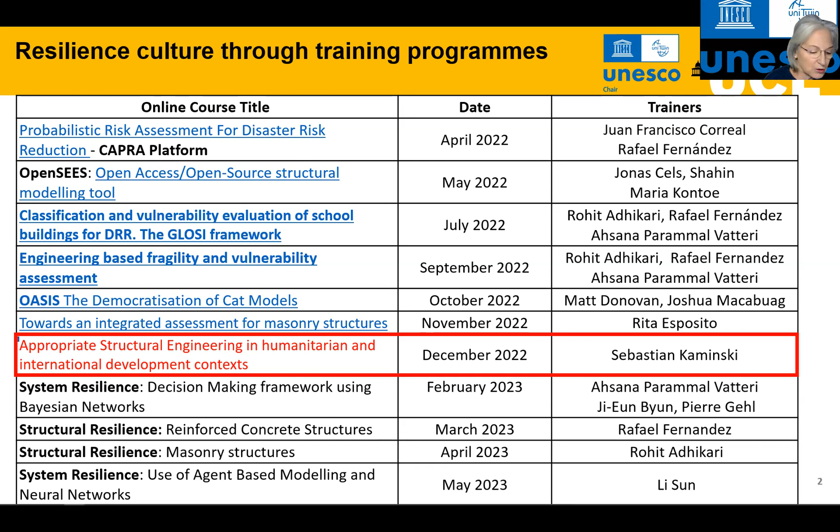So today I would like to introduce the talk by Dr. Sebastian Kaminski. He's an engineer associate at Arup, and he has been here in London, and he has been working for a long time in the field of humanitarian and development constructions and reconstructions in various contexts, affected by natural hazards or at risk of being affected by natural hazards.

Sebastian will introduce his talk in more detail in 2 minutes, but as we are at the end of the year, I would like to expand a little bit on our other activities besides the educational offer, which, as you have seen from the previous slides, will continue from February.

We already have 4 more courses programmed, and these will all be 1 or 2 day extended activities or full training. But in the meantime, the UNESCO Chair in Disaster Risk Reduction and Resilience is also developing some actual research projects.

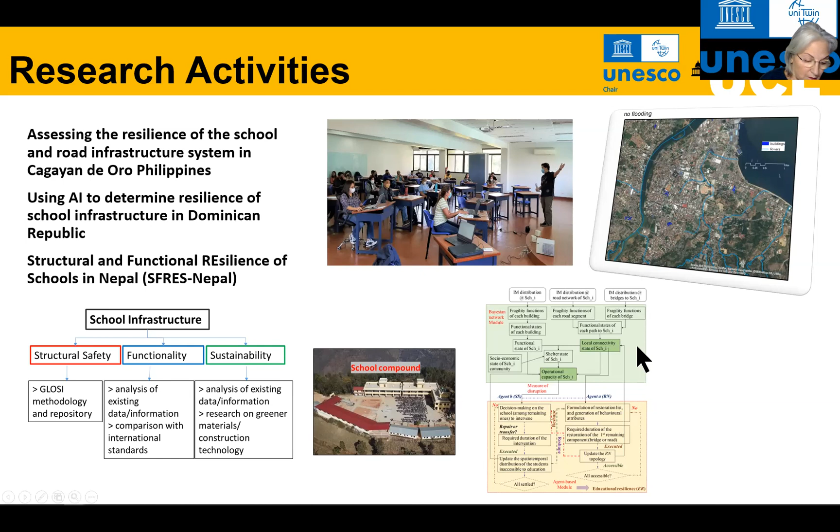So besides doing research and meeting you online, we have also been to a number of international and national events which are worth bringing to your attention. At the beginning of November, UNESCO celebrated an international conference for the 30th anniversary of the UNESCO Chairs programs.

It was a very amazing meeting lasting 2 days with as many as 600 attendees, one or more for each of the chairs that are bestowed all over the world. As a result of these meetings, we have extended a network among European chairs, established a network among UK chairs, and a network among chairs on disaster risk reduction.

It might be worth understanding that the UNESCO chairs are in any field of culture and science. So in fact, the chairs in engineering and in disaster risk reduction are not so many, just about 10.

Besides that, I've been working quite a bit with the Foreign Commonwealth and Development Office of the UK government. In particular, we have contributed to a position paper on education and climate change, which should be available soon, and you will find a link on our webpage. This is particularly aimed at understanding the double whammy of negative actions on women's and girls' education, coming from the effect of climate change and the effect of poor school infrastructure, and therefore how we can improve that.

Thank you very much, Dina. Shall I start? Yes, please. Right, so I'm just going to share my screen. Can everyone see that? Yes, we can. Thank you. Excellent, just setting up.

Great, okay. Well, thank you first, everyone, for attending this talk today. I hope you find it interesting. And thank you very much, UCL, for inviting me to talk on this interesting topic.

So I'm going to be focusing on appropriate structural engineering in humanitarian and development contexts.

Is it possible to mute the sound when people come in, or? Unfortunately not. Okay, no, that's okay, no worries.

So basically, globally, we desperately need more resilient homes and schools in developing countries. At the same time, we do need to maximize the use of low carbon materials, such as timber, bamboo, and soil. We have to be honest that it is more difficult to design with these. So in this talk, what I'd like to do is talk about, firstly, how we can design appropriate structure and appropriate schools and housing in these contexts while trying to maximize the use of low carbon materials. And that's not an easy balance.

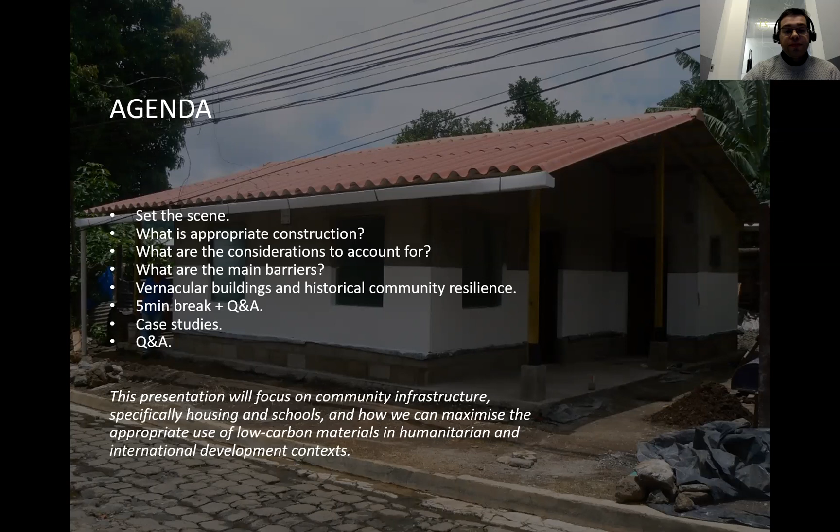So let's start by setting the scene. What do we need to achieve and why? Firstly, in terms of climate change, I'm sure we all know that cement contributes towards around 8% of global CO2 emissions. Now that's enormous, and that's something we need to do something about, urgently.

At the same time, we need to consider the magnitude of inadequate construction combined with natural disasters. Around 1.6 billion people live in inadequate housing worldwide. That's a significant proportion. When we say inadequate housing, that's any sort of housing which is unsafe structurally or exposed to other hazards such as flooding, or it's too cramped or unhygienic. At the same time, earthquakes are actually the primary source of deaths in natural hazards, around 60,000 people per year globally on average. Some years there'll be more, some years there'll be less.

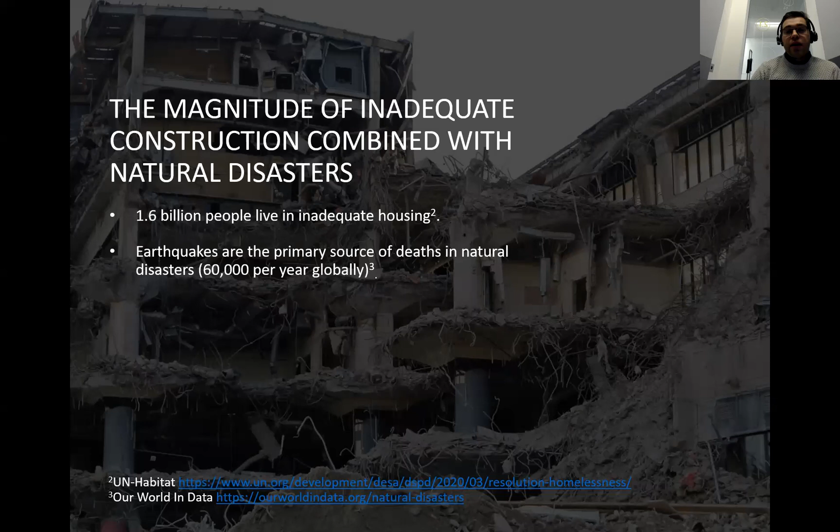So why are so many buildings in developing countries so vulnerable structurally to earthquakes? I think we can summarize this down to two real reasons: firstly, inadequate structural design, and secondly, durability issues. When I say durability, that's the design's reached the end of its design life, or it wasn't designed properly to begin with.

Geotechnical issues also play an important part, but these can be difficult and expensive to resolve structurally. The reasons behind the inadequate structural design and durability issues are primarily a lack of funds and a lack of knowledge. With both funds and knowledge, we're able to create very resilient buildings.

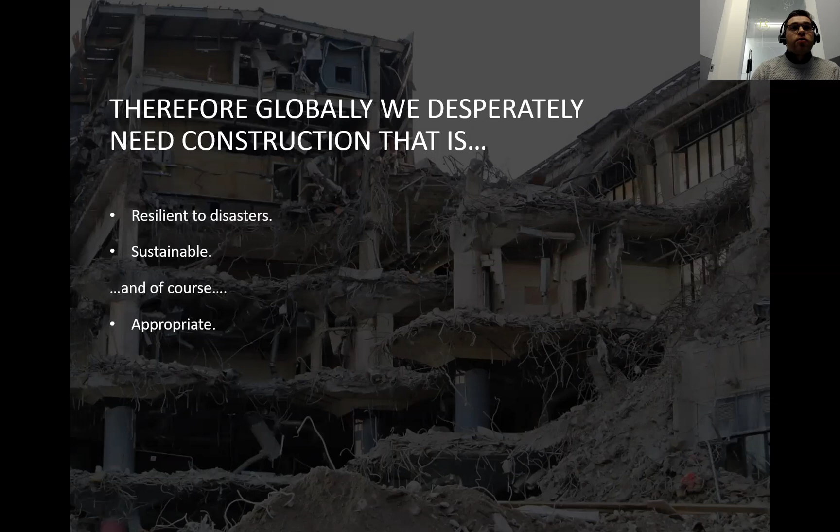So globally, therefore, we desperately need construction that is resilient to disasters and sustainable, low carbon, and of course, appropriate. So what is appropriate? It's one of those buzzwords that we hear a lot, but what does it actually mean?

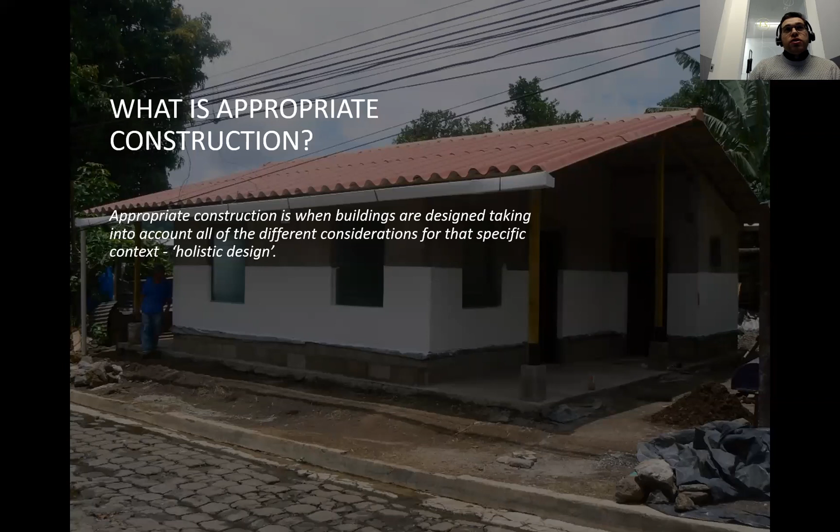I'm not sure there's one definition for this context. This is just my definition. Appropriate construction for me is when buildings are designed taking into account all of the different considerations for that specific context. We can call it holistic design.

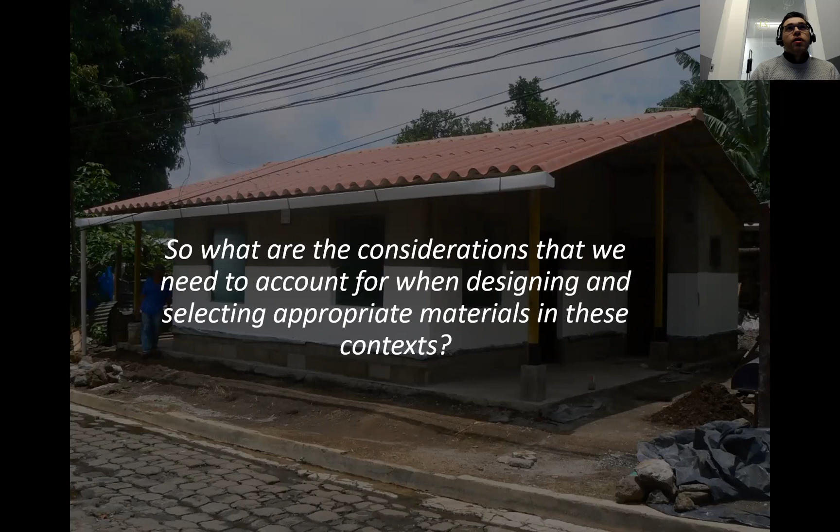So what are these considerations that we need to account for when designing and selecting appropriate materials in these contexts? Let's go through them, there's quite a lot. Budget. Unfortunately, that is one of the biggest constraints. It defines what we can and can't do right from the beginning.

Material availability. We see in these contexts, whatever materials we have available are what we can use or can't. Local is always preferred. However, sometimes it may be more appropriate to go further abroad if for the design it's more holistically appropriate, and the material needs to be of the right quality.

So a couple of examples there. We've worked on a project in Central America, and we wanted to use timber for the structure. Now, the local timber there was actually quite expensive, it wasn't properly structurally graded, and it was treated with quite an old toxic chemical - CCA, copper, chrome, arsenic, which is now banned for non-commercial use in, say, Europe.

And it doesn't come from a reliable sustainable source, so it wasn't FSC or equivalent certified. On the other hand, we were able to source timber from the States, which was available locally but shipped from the US, which ticked all those boxes - it was certified, it was cheap, it was graded. So in that particular case, it was more appropriate for us to select a material which came from further afield. That's just one example, there might be others, but obviously we want to go local where we can.

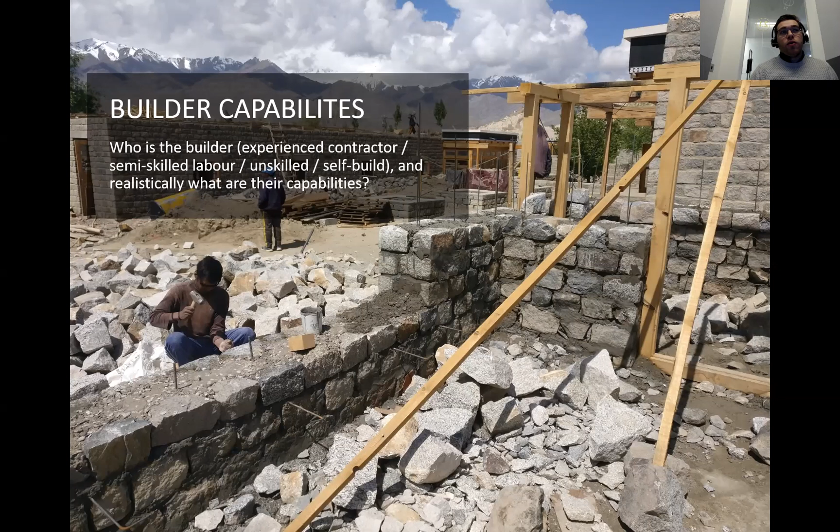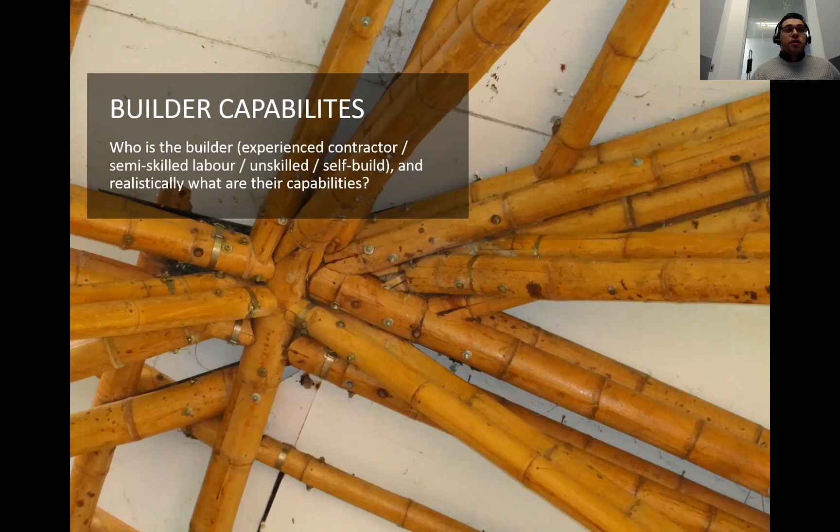We don't want to end up with something like this. This is a bamboo project where you can see there's a lot of splitting of the bamboo. The connection just wasn't clearly designed or built right.

Designer capabilities. This is important to understand. What are the capabilities of the design team? Sometimes we might be the design team, sometimes we might be on the client side, sometimes we might be developing a scheme design, which then a local design team takes forward.

It's important to understand what are their capabilities. Do they understand the particular material we're working with? For a recent example, we're working in a country with an NGO where they're building a community center, and we proposed reinforced block work because we felt holistically for that context it was the most appropriate. The local design team didn't have experience with reinforced block work, and that was a big issue, of course.

So in that case, we actually tried to upskill them, provide some example calculations that they could then use and hopefully be able to construct that well and use it on other projects. But in some cases, we were very close to saying, well, unfortunately, what we think is the most appropriate technology, you can't use, so you need to pick a different one. But in that case, we were able to overcome that.

Codes and guidance available. Are the local codes state-of-the-art, comprehensive, and easy to follow? There are very few codes in the world that are all three of those. The state-of-the-art codes tend to be very difficult to follow, and we have to be honest about that.

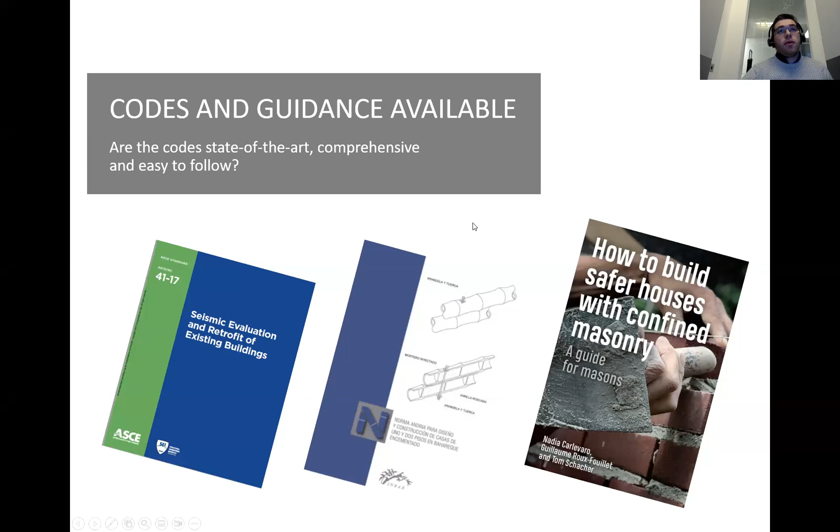Hazards. We always need to understand what hazards the buildings will be exposed to. It's really important to draw on local knowledge, but be aware of some misconceptions and also draw on broader scientific data. Certain hazards may be better captured in local knowledge and certain hazards better by broader scientific data, especially where you have hazards of different return periods.

A hazard with quite a long return period may be beyond the memory of the local community, such as earthquakes. So the locals may believe that actually the area isn't very highly seismic. Broader scientific data says differently.

On the other side, local knowledge can often capture things like flooding better than broader scientific data. So it's important to review both of those, try and capture that, and be aware of some misconceptions on both sides. At the same time, include fire risks, which is a real hazard, especially in things like refugee camps. That can really define your material.

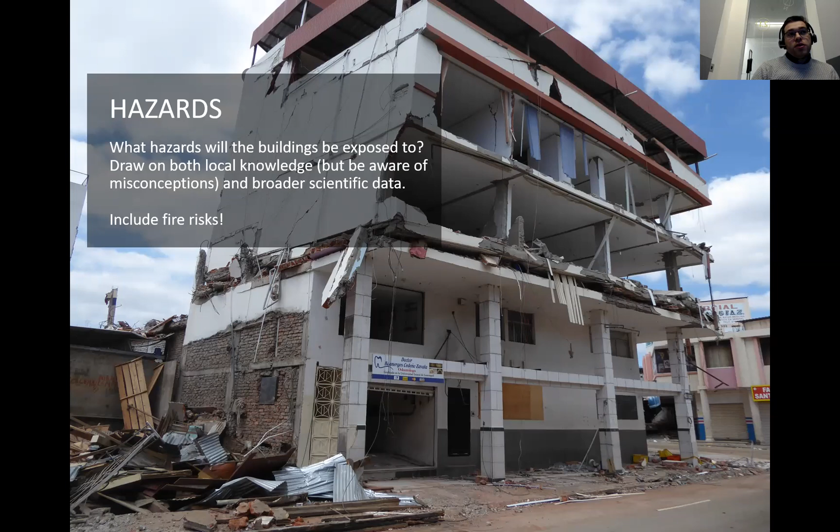So hazards where events are infrequent may be beyond the memory of the community. One example is Haiti. Prior to the 2010 earthquake, the last large earthquake was around 170 years before, way outside of the memory of the community. And that's one of the reasons, not the only one, but one of the reasons why the buildings were very vulnerable.

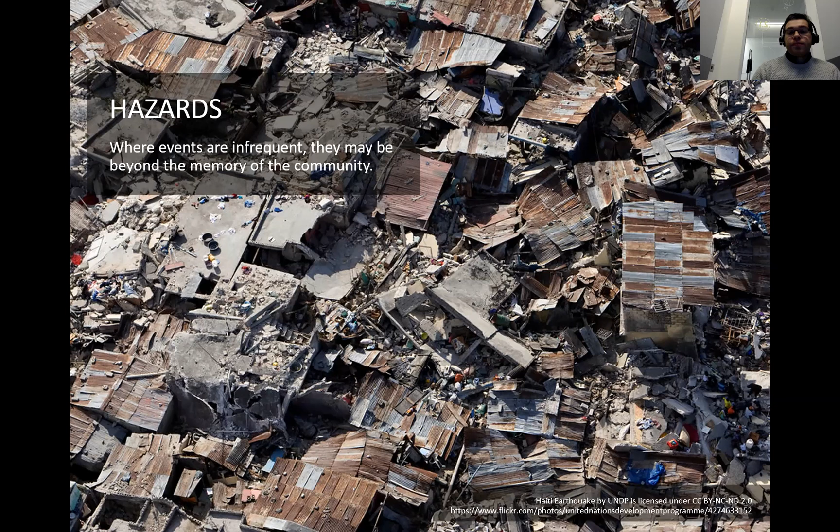Structural performance requirements sought. In humanitarian contexts, and when I say humanitarian I'm thinking more emergencies, we can normally just achieve the best we can within those constraints. It's an emergency context. We're trying to provide shelter, schools, or warmth as quickly as we can to probably quite a large affected population. We can't achieve code compliance. Fair enough. We just want to achieve the best we can.

But in longer term development projects, why shouldn't communities in developing countries have the same resilience and durability that we're working towards in developed countries? I mention this because it doesn't always happen, unfortunately.

In California, for example, they routinely design, well, especially more and more now, routinely design beyond code because they know that actually it's generally better and cheaper, taking into account the entire whole life of a building, to have a more resilient structure from the beginning.

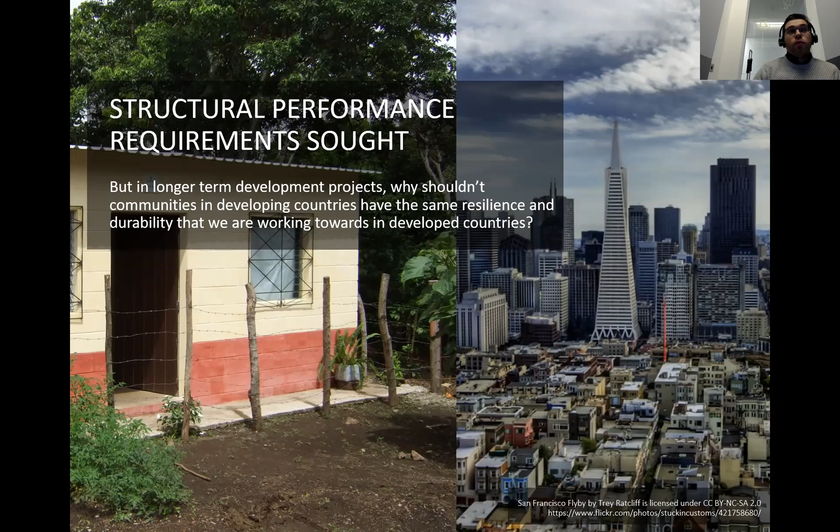Financially, it's actually a better decision to invest more money at the beginning rather than deal with the impact of a disaster. And it's the same in vulnerable communities in developing countries. Why shouldn't they have the same resilience and durability? It doesn't always happen, but in my opinion, I think it's very important that we should really strive to always have that, especially for

schools. Exposure conditions for durability. This is very important to understand, and actually it's one of the areas where we see a lot of issues. So what conditions are the proposed materials being exposed to?

Insects, rot, corrosion, weathering. And we should really be looking for a 50-year design life. Most codes, without stating it, actually design for a 50-year design life. Reinforced concrete codes and steel codes and so forth. Even timber codes, without stating it, generally assume a 50-year design life.

But this often isn't achieved in practice because the design doesn't cater for that, and it's mainly about exposure conditions. And we see with natural materials such as timber and bamboo that designers often underestimate the risk of rot because it's not immediate. It's not something you see on day one or after a year, but after 5 or 10 years, you can start to see that.

And often codes in this area aren't adequate. For example, only 2 out of 11 of the main bamboo design codes that exist around the world properly tackle durability against rot. And that's a significant gap in the information.

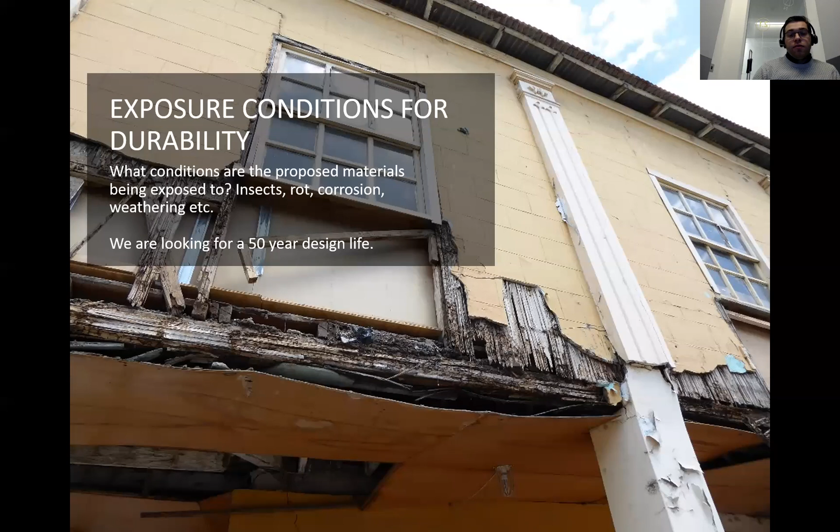End user maintenance capabilities. We often hear people propose that it doesn't really matter about the design life, because communities will just replace key structural elements of their buildings, schools, or homes. Is that really appropriate, to have a vulnerable community periodically replace key structural elements? Non-structural elements is fine, but key structural elements, we don't do that on our houses in the UK, do we? We expect key structural elements to last at least 50 years.

General maintenance is conducted especially on non-structural elements, since it's very difficult to replace key structural elements. The end user may often forget this is important, or not be aware of it. They may have moved out and someone else occupies the building, so often they're not informed correctly that this maintenance is required. They may not have the resources or technical expertise to do this. Generally, I feel it's not appropriate to require a vulnerable community to have to do this.

We can design buildings out of all materials, including natural materials like timber, bamboo, and soil, to have a 50-year design life with minimum maintenance. It's quite easy to do, and it has been done, so we should just go ahead and do that.

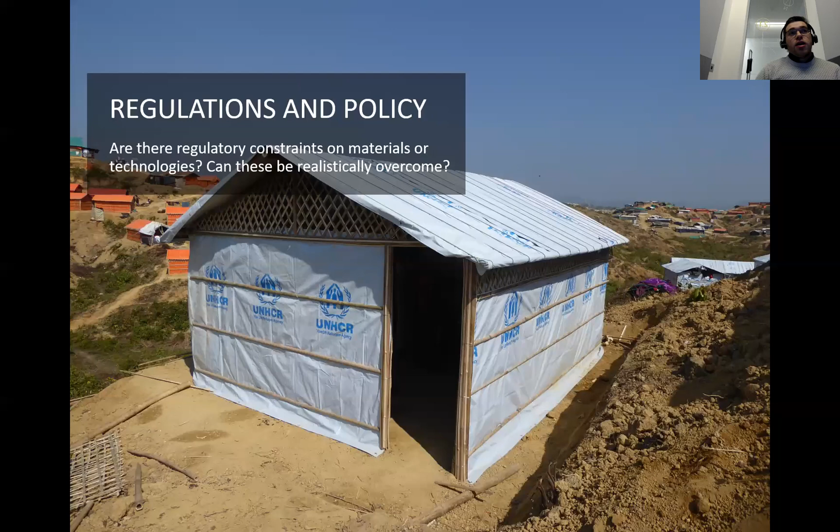Construction safety. Are there any construction-related risks associated with the proposed materials or technologies? We shouldn't just design something, assume it'll be built, and not care about the safety of the workers during construction. We might be picking a certain technology which requires working at height.

We might be using certain treatment chemicals on the bamboo or timber which are actually quite toxic. Then we need to think, will the treatment workers realistically be using the right PPE? How will the chemical be disposed of? Those are real things to think about. In many cases, we've actually specifically not selected some materials because we feel the construction workers will be exposed to risks which are disproportionate.

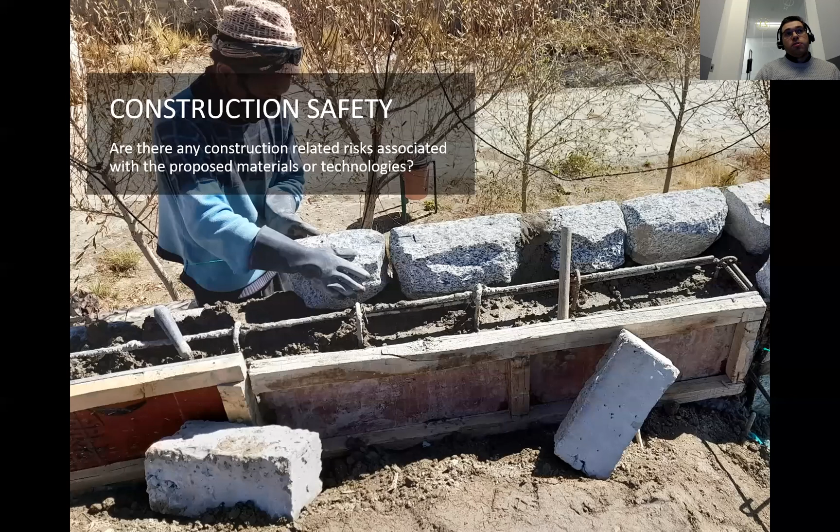Requirements for extensions, adaptations, replicability. This is a tricky one. Does the design need to cater for extensions or adaptations by the end user? It's actually very difficult to have a design, a school or a house, which can be simply and safely extended. Reinforced concrete can be done, but often that doesn't go quite right, and it's much more tricky with natural materials such as soil, timber, or bamboo.

At the same time, is the intention that the design gets replicated by the community themselves? Full self-build construction is very difficult to influence and very difficult to create a new technology around. It takes decades for a new technology to filter down to a community so they can actually self-build it. Often we see designs where people say this is going to be a self-build design, but it doesn't go anywhere because it's so difficult to trickle down.

It's important to understand the local annual climate, as this can affect the structural and non-structural materials. If we have a hot climate, thermal mass is good, and heavy, large, thick walls can work well. There are other ways to reduce the temperature in a building too, for example a light roof, large overhang, large windows, and ventilation.

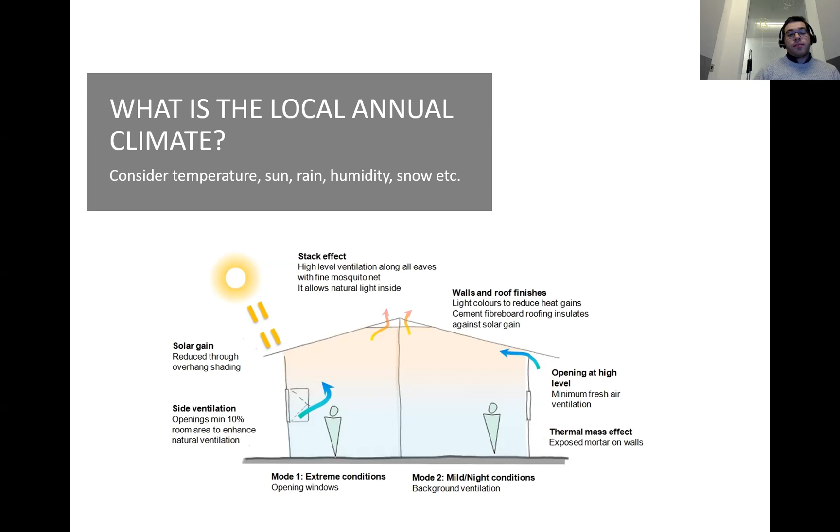Local cultural considerations are really important - keeping up with the Joneses, as you might call it. People worldwide tend to aspire to have what they perceive to be a better, stronger, more durable form of house construction, one that reflects a higher level of prosperity compared with their neighbors.

Bamboo is regarded as a poor man's timber, and timber is regarded as a poor man's concrete. People generally want to live in a reinforced concrete or reinforced blockwork house. That's very common. People generally don't want to live in a bamboo house or a timber house.

It is possible to change those perceptions, and we've done it before. We did it on a project in Latin America where we developed a bamboo house. Initially the community said, 'I don't want to live in a bamboo house - bamboo doesn't last very long, it's not very good, I want to live in a concrete house.' We showed them the design and did some workshops. By the end of that process, they'd all done a 180, and they all preferred the bamboo house to the concrete house. So it's possible to change people's perceptions, but it's difficult.

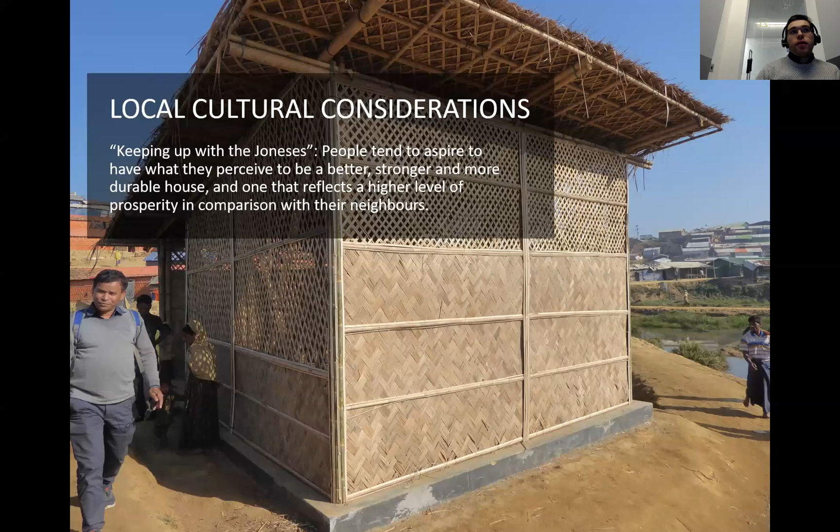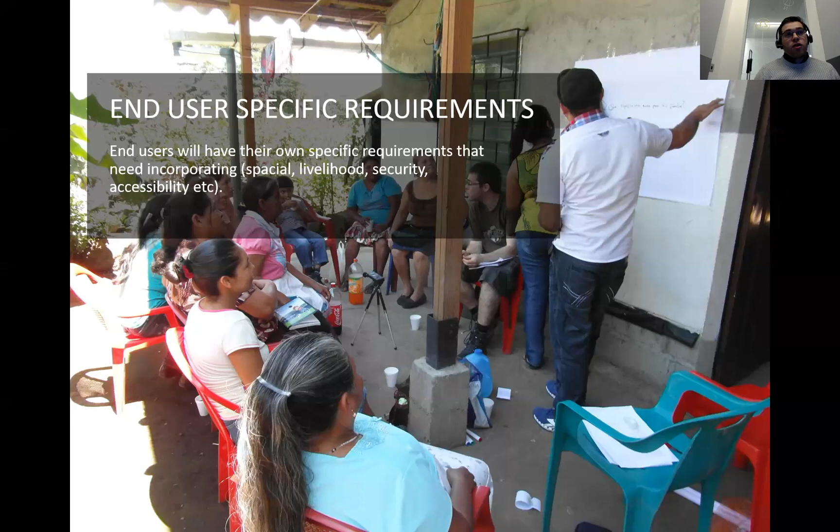That's just one of many local cultural considerations there might be. There may also be additional end-user specific requirements that we need to incorporate. They may be spatial - how they want their layout - or related to livelihood, like wanting a shop space with an open front. They may want security features like multiple exits, bars on windows, or accessibility. All of these can affect the structural and non-structural materials of a design.

Embodied carbon of materials and construction techniques is essential, something we should be doing routinely for every project now. We should be considering the whole-life embodied carbon, including the design life of the entire structure.

Natural materials such as timber and bamboo are not automatically lower carbon compared with concrete and steel. They can be, and often are, but not automatically - it depends on their design life and how they're built. For example, for fire protection of timber and bamboo, we may have to use plasterboard, which can have quite a high embodied carbon.

When you take that into account, in some cases you may find that concrete actually performs better than bamboo or timber - it's quite rare, but it does happen. So we should be looking at the whole building embodied carbon, and at the same time take into account the design life. If a bamboo house only lasts 10 years, but a concrete house lasts 50 years, then maybe the bamboo house has a lower embodied carbon, but it only lasts 10 years - we're not comparing apples with apples. So we should be taking that design life into account.

It's also important to understand the wider social and environmental impact of materials - how they're being sourced, where from, and how waste is disposed of. One example is the Rohingya refugee camps - as far as the eye can see, you cannot see any vegetation or trees. They've all been cut down for construction and firewood. So sourcing materials from there can actually have a knock-on impact.

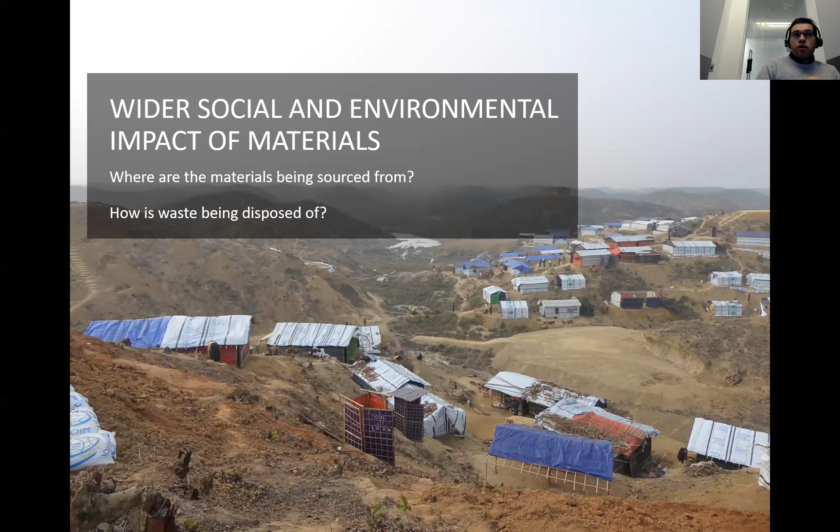At the same time, how is waste being disposed of? I'm thinking particularly of treatment chemicals for bamboo or timber. If we're keen to use a natural material but need to treat it with a toxic chemical that's likely to be disposed of close to a drinking source, that's just not appropriate. Sometimes we might say we'll just tell them not to do that, but if we think that's realistically going to happen despite the controls in place, maybe that's not the right material to select.

How complex is the proposed design, taking into account the number of stories? If we are using more modern or natural materials, we have to admit that the codes are still not as advanced as, say, reinforced concrete and steel. So it may be more challenging to have a complex design or a large number of stories.

One example is the new ISO 22156 bamboo code, published in 2021, which is arguably one of the most advanced bamboo codes around. We limited the number of stories to 2 intentionally because there's actually quite little data to support beyond that at the moment. In the future we can expand that, but for now we are a little bit nervous.

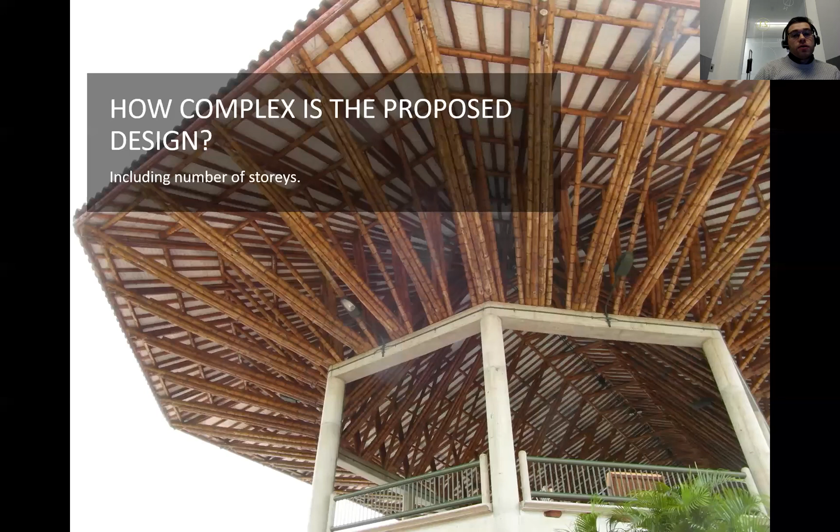So that's quite a lot to think about. These are in no particular order, and there may be more - these are just key ones that have come to mind. But you can see there's a lot we need to consider when properly choosing what materials are appropriate for these contexts, and therefore what technologies.

So now we know that, what are the main barriers towards wide-scale appropriate construction that maximizes low carbon materials?

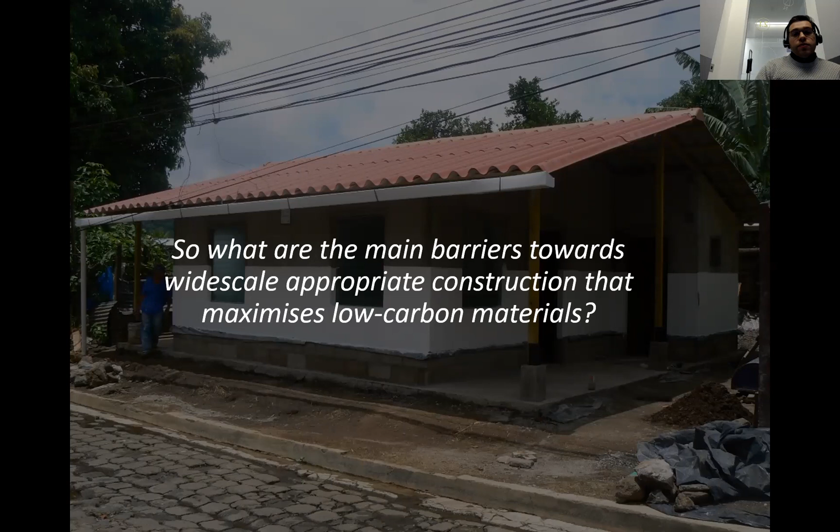Back to our friend budget, unfortunately this is always a constraint. It's a bit of a misconception that bamboo, timber and soil are automatically cheaper. It's not necessarily true. If we're designing properly, sometimes they can be more expensive because more testing is required, since the codes don't have the data in place to support design without testing.

Certainly the same for bamboo and soil, and with certain types of timber that's also true. Whereas reinforced concrete generally doesn't require testing - one can just go ahead and pick up a code and use it. So unfortunately it is a real constraint. Over time, as there's more knowledge, that will improve, but it's a real constraint at the moment.

Knowledge - this is very important. Reinforced concrete has so much knowledge out there. Most codes have their own concrete code or point to another concrete code that's very well established. Whereas other materials, timber for example, the codes around the world are sometimes very basic. The bamboo codes - many countries don't have them, and some that do exist are quite basic. Even the most advanced codes, the Colombian and the ISO code, are comparatively basic compared with the reinforced concrete code.

It's similar with soil - there are very few codes around. Also with masonry, especially simple masonry structures like reinforced masonry and confined masonry, there are comparatively few codes and guidance around.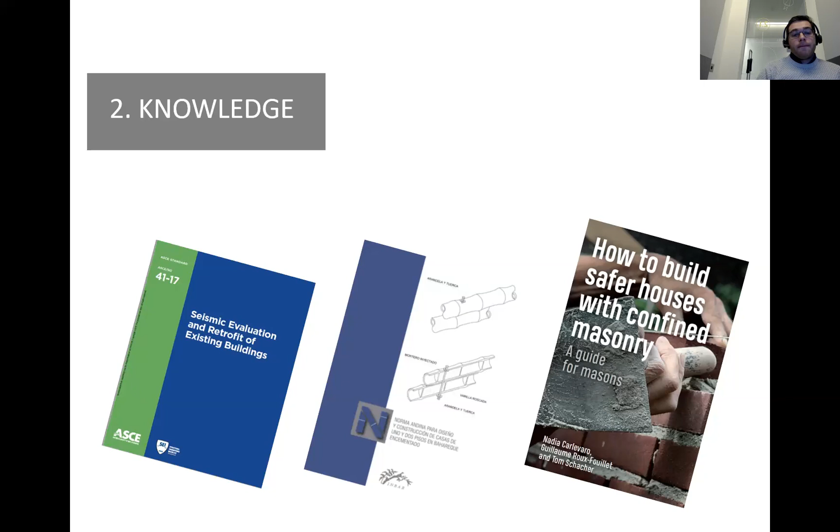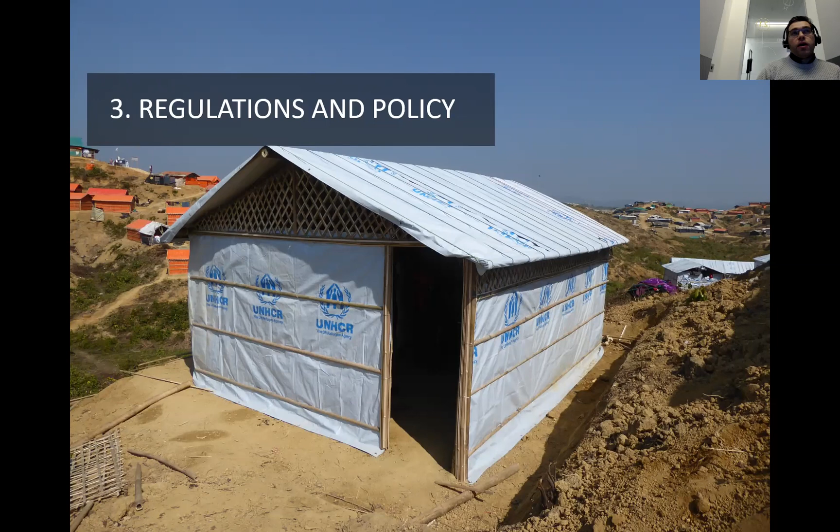Regulations and policy - again, if the regulations aren't in place to use natural materials such as timber and bamboo, sometimes we can't use them. As I mentioned before, sometimes we can engage with authorities, and if we've got enough time, we can even start to write the codes - that's one way of overcoming those barriers.

Similar to before, community aspirations. We need to be aware that people do prefer certain materials, but it can be possible to overcome that. We shouldn't force them, but we can work with the community to describe why this material, bamboo or timber in this particular case, is now durable - how have we made it appropriate, and how have we overcome their concerns with that material?

A desire to reinvent the wheel - this is an important one. We often see in developing world contexts and humanitarian contexts a desire to bring in alien technologies. On the screen now, these four aren't taken from developing world contexts, they're just general ones, but we see people trying to bring in plastic bottle housing, super adobe housing, tires, containers - all sorts of alien, unusual materials.

And people say, oh, this could be a material that this context needs - this is their solution for housing. With these alien materials, there's often a lot of problems with them.

They often don't satisfy many of the requirements I've just talked about. So many of these are very seismically unsafe. They're not very durable, they're not an appropriate way of actually recycling waste, and they can be unsafe in many different ways. Communities can't adapt them, which is very important, and they can't maintain them. Communities who haven't traditionally lived in round houses generally don't want to live in round houses - they want to live in square houses. Again, these are things which are really important to consider.

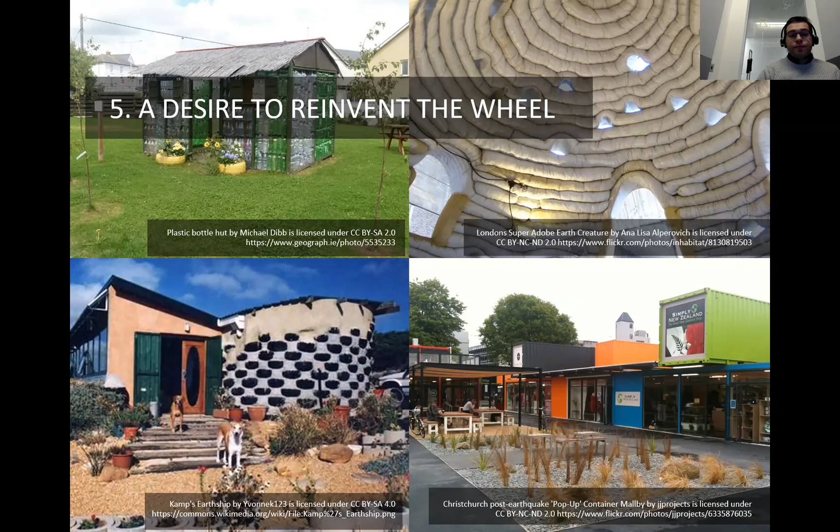Misconceptions. So like in all sectors, there are misconceptions, and I think it's important to know that because of these, we're not always building back better in these contexts. Beware some of the online guidance available, especially regarding seismic resistance and durability of materials such as timber, bamboo, and earth, because some of it isn't quite correct. It's very easy to read Wikipedia or Google and find lots of guidance, and it's difficult to know what is correct. I'd always recommend speaking to the experts and trying to get a wider range of different views.

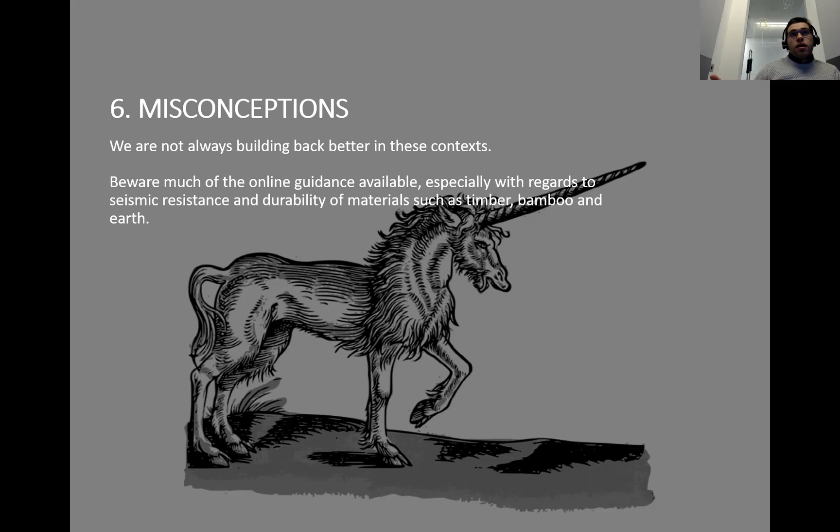There's a lot of misconceptions out there, and this isn't helped with these natural materials, where the research is comparatively new, and people may believe they're experts after only a limited amount of work in that field. If you are working with these, I'd always recommend speaking to a structural engineer for advice on timber, bamboo, and earth. And if we're talking about seismic design, they should be a seismic engineer.

Another example here is bamboo reinforced concrete. We actually see people trying to propose this, and we've seen people try and build with this. It's just one example of a technology which doesn't really work. People are trying to remove the steel from concrete and replace it with bamboo. Bamboo is much weaker, it's not compatible in terms of its properties, and it can rot in the concrete. Actually, if you do the analysis properly, you end up with something that has worse embodied carbon because you need a thicker amount of concrete. Yet there still continues to be research in this field. So just beware that there are some of these misconceptions.

Three papers that I've put up here deal with some of these misconceptions. The first one's on bamboo reinforced concrete. The second one is durability of bamboo, and the third, upcoming and not yet published, is the seismic performance of bamboo.

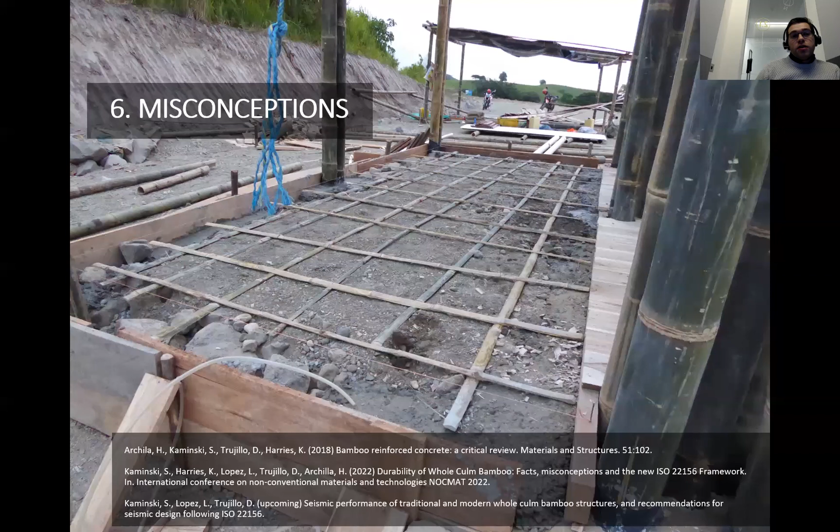Industrial pressure and corruption. Unfortunately, this can be a constraint which can stop us building with natural materials. One example here is a project where quite a lot of bamboo houses were built. In the past, this was a very successful project. The houses were very good quality, very cost effective, and very seismically resilient, especially compared with the existing housing technology within that country, which was more traditional, less safe, and more expensive. The bamboo project unfortunately had to stop because of death threats from the other industry. So it does happen, unfortunately.

Most new construction in developing countries is self-built. We need to be honest with that. This is real, and it's very difficult to positively influence. Modern code compliant houses are normally beyond the technical knowledge and purchasing power of fully self-built construction. So when we're developing designs, we need to be realistic about which market we're actually targeting, and there isn't one size fits all solution. Are we trying to influence the larger self-build market, which is difficult, but we need to try and support it?

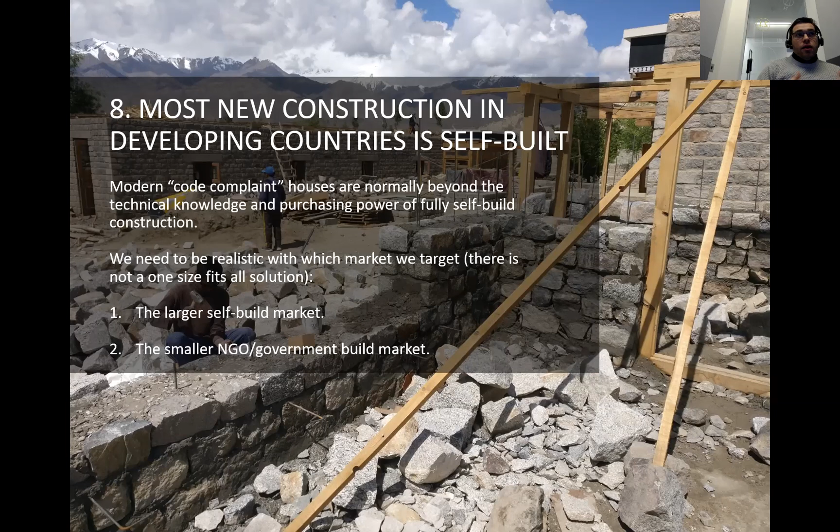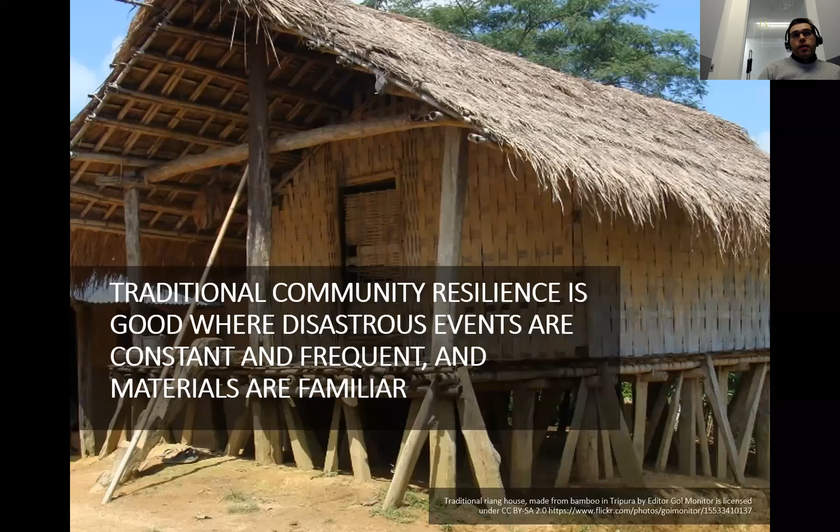But where events are infrequent or change, we can start to see a change in resilience. Haiti, again, also where other effects disrupt the community. This is the Rohingya refugee camps. They were previously further inland, a little bit more protected from cyclones, and had more vegetation around them. They're now in a more vulnerable position, having moved far closer to the coast with very little vegetation to protect them.

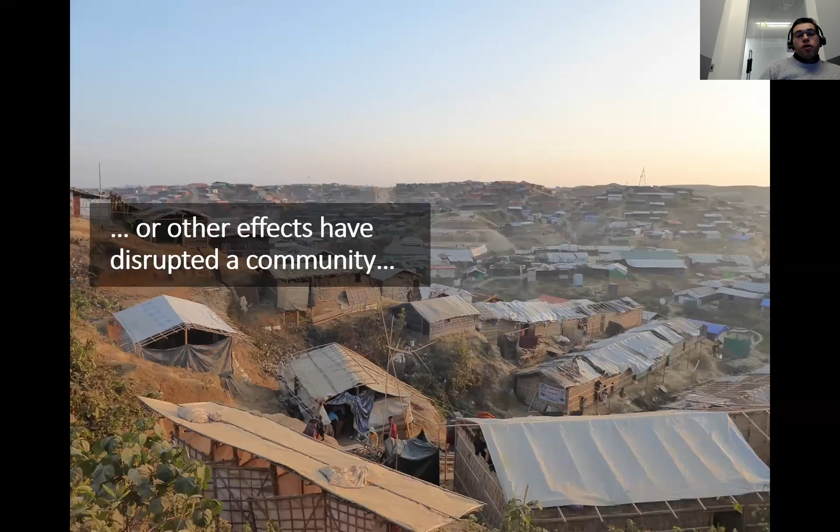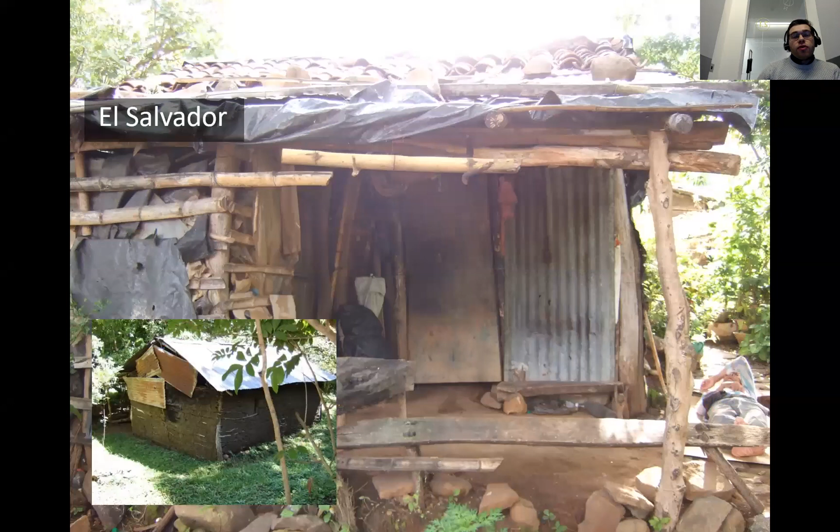Starting off in El Salvador, developing a seismically resilient and sustainable housing system. El Salvador is in Central America, a small country, a very highly seismic area, very mountainous, generally quite poor as well, with aggressive climate conditions, very hot and very heavy rainfall, so quite bad for natural materials. A lot of the population still live in very vulnerable housing due to the poverty there, and ever since the civil war there is a large housing deficit within that country.

For the past 12 years, we've been working closely with a small local NGO called Redes to develop a more sustainable form of construction for housing in rural and peri-urban areas that is seismically resistant, simple to construct using semi-skilled labor, able to be constructed in poor soil conditions, durable and low maintenance, cost-effective, sustainable, uses local materials, culturally acceptable, thermally comfortable, and appropriate for the community.

As you can imagine, a lot of those constraints are quite obvious. It's worth stressing that in this brief we've specifically said this is for housing in rural and peri-urban areas, simple to construct using semi-skilled labor. We're not trying to say this is housing that can do everything, I think that's quite unrealistic. By trying to do that, you end up not completing the project, or it ends up being too expensive or too complex.

So it's important to refine exactly who we are targeting. In this case, it was housing for rural and peri-urban areas. Urban area housing is a different matter, it's more complex, so we've intentionally said we're not designing for that. Maybe it can be used, but we're not intentionally designing for that. At the same time, we acknowledge that by trying to develop something more sustainable, it's unlikely to be the self-build market, so we've acknowledged it's going to be constructed using semi-skilled labor. That immediately unlocks the ability to use certain techniques which a fully self-build system may not.

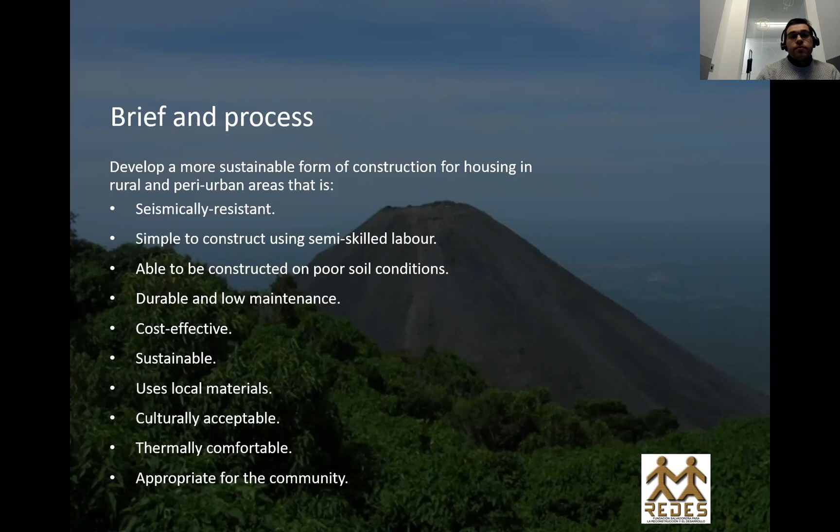So we started by reviewing the existing construction systems in the country, and this is essential to do on any of these projects - we need to understand what's typically built locally. There we've got housing out of reinforced masonry, confined masonry, precast concrete, and adobe. The reinforced masonry housing there is constructed by the majority of NGOs and the government, and actually it's very good, to be honest. It's very easy to build, hard to go wrong, durable, has good seismic resistance, and generally quite affordable as well, so we have a good technology out there.

The downside is it's generally quite high carbon. As you can imagine, it uses concrete blocks, concrete infill, and a lot of steel reinforcement. During this process, this is when we discovered the Bahareque system, which, as I mentioned before, is a derivative of wattle and daub. Most countries have a derivative of wattle and daub because it's just a very clever construction system. It uses timber or bamboo, which all countries have one or the other or both, for the frame, which we clad in a matrix of timber or bamboo and finally plaster with mud.

You can build it pretty much in any country, but each country has their own version. The Bahareque system in Latin America uses a lot of bamboo. In El Salvador, it tends to use timber for the frame and bamboo for the wall matrix because there isn't a large diameter bamboo out there.

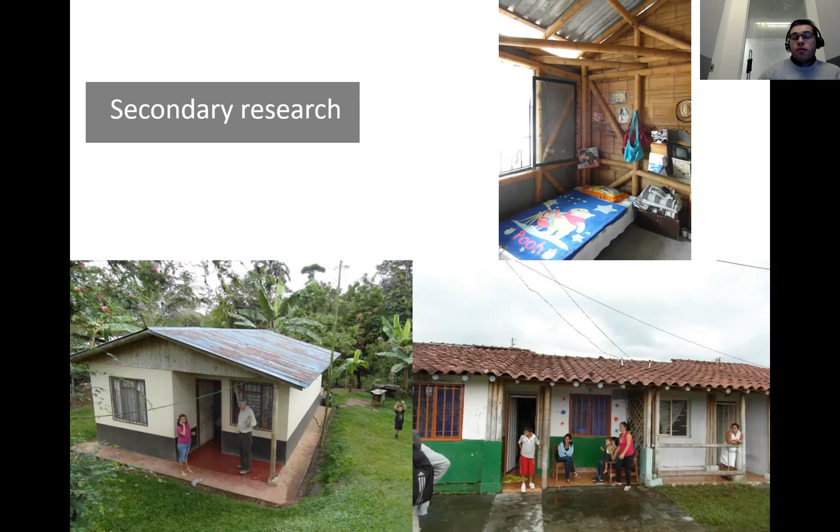Bottom left, this is Costa Rica. Over 1,000 houses were built with this system in the 1980s, still there in excellent condition - a very successful project. Bottom right and top right, this is Colombia after the 1999 coffee growing region earthquake, where they built several thousand of these houses as well - also very successful. In the Philippines, we've got Base Bahay working with the Hilti Foundation, constructing 1- and 2-story housing using a similar system very successfully. As you can see, it looks very modern. So several thousand of this system have been built around the world, which gave us a lot of confidence in its potential.

We then followed an owner-driven approach, involving the community at every stage in the process. This is very important - it gives us so much important data and allows us to develop something really appropriate for that community. We involved them through workshops, interviews, focus groups, and spatial planning workshops, trying to understand their perceptions of different materials and what they needed from a house.

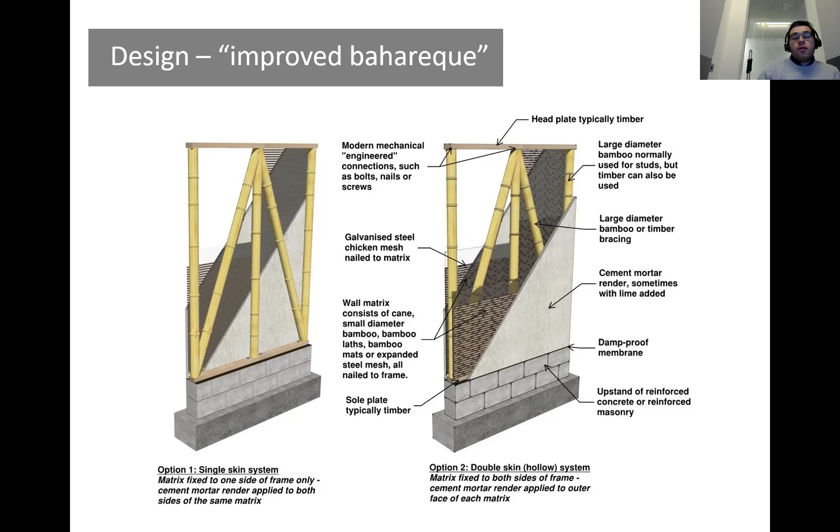Drawing all of that together, we came up with an improved Bahareque system for El Salvador. This used a timber frame clad in a bamboo matrix with a cement mortar render. The bamboo and timber were fully treated to protect against insect attack, and all the connections are engineered. The mortar provides additional durability, and this system can have a design life approaching 50 years when properly designed. It's fully code compliant from a seismic point of view, exceeding the requirements of the El Salvadorian code, and it's very popular with the community.

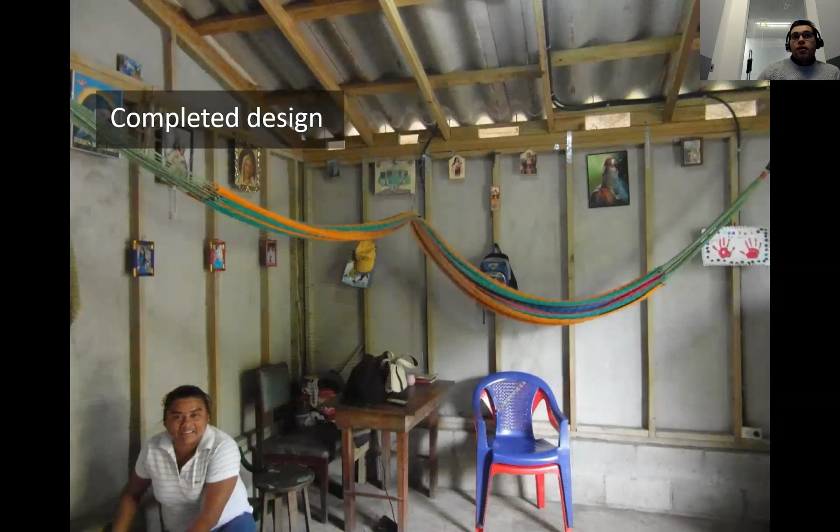This is the complete design before and after rendering. As you can see, it looks quite modern - it looks like a masonry house, and the community really liked it. This is the inside, where the timber is exposed. Again, the community really liked that design, and preferred it to masonry once they'd gone through the process.

We did a lot of testing to get there, and all the other organizations working on similar systems have done testing too. That wasn't easy - we couldn't just develop it from scratch. This is one of the tests we did: a full-scale shake table test of one room of the house, tested in Guatemala on the shake table at the Mariano Gálvez University there.

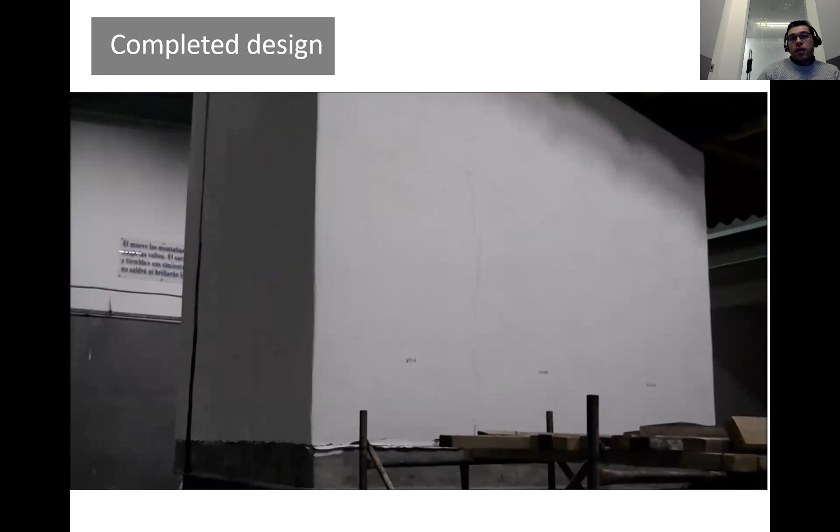This is tested to an earthquake that's over 2 times greater than what we need to design for in El Salvador - an enormous earthquake. This sample had already been through around 20 cycles of earthquake, and this was the largest one.

And the house was cracked, but it wasn't significantly damaged. It could be occupied immediately, and with simple repairs, it can be used. So it exceeded life safety from that requirement. It performed very well. So that was positive.

How we designed for sustainability: we tried to minimize the embodied carbon of the house as much as possible. We used timber for the frame. We looked at using local timber, but we weren't convinced that was holistically appropriate to use timber which wasn't FSC or equivalent certified and was treated with a more toxic chemical. So we used timber that's locally available but shipped from the US because it is FSC certified. Worth mentioning that the embodied carbon of shipping actually isn't that high. The biggest impact of embodied carbon is when materials are transported by land. This probably does have a higher embodied carbon than local timber, but we felt overall this was more appropriate.

The bamboo is bought locally, direct from farmers, and we've treated that with boron, which is a safe chemical to use, which is still very effective against insect attack.

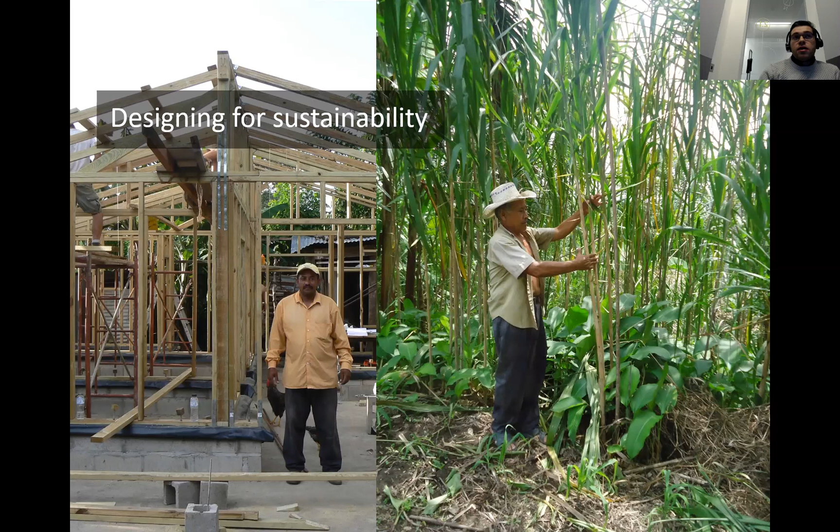Thermal comfort: the thermal mass of those walls actually provides some thermal benefits at night and during the day, during hot weather, and we've incorporated other simple techniques to keep the house cool: large openings, large doors, large windows, high level openings, and a large roof.

I forgot to mention also the embodied carbon of that house is around 50% of the embodied carbon of a reinforced blockwork house, and that's because we use a lot less cement. We use around half the cement content. Even though we do have cement mortar walls, it's a lot less than blockwork.

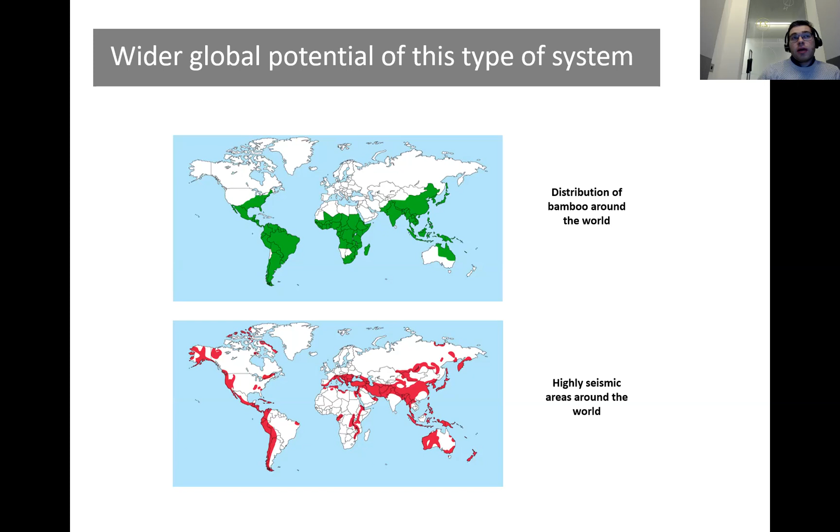There is wider potential for this type of system around the world. You can see in the top that distribution of bamboo around the world, and at the bottom are where we have highly seismic areas. A lot of those overlap. So we're working with other organizations, doing as much knowledge sharing as we can, trying to standardize the system and start to break down some of those barriers so other NGOs could potentially adopt it. We've incorporated this into the ISO 22156 code, the latest bamboo structural design code, published in 2021. We've also written several bilingual guides on using this system.

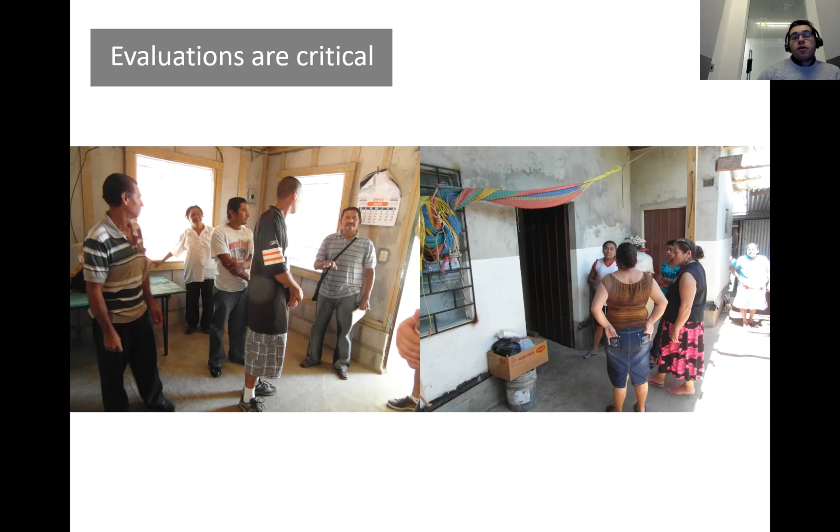Just to emphasize that evaluations are critical at many stages of the process, not just immediately after the building's been done, but ideally after 5, 10, 15 years, so you know how it's performed from a durability perspective. We did a lot of rigorous evaluations, and they were invaluable to find what the community thought about the design, and we've incorporated that into it.

I want to stress what we tried to do on this project: we tried to select the construction material and technique most appropriate for the context. We didn't just try to push bamboo because it's known to be sustainable - we weren't trying to push a square peg into a round hole. We were trying to maximize the use of low carbon materials, but we shouldn't start with a low carbon material and say, let's push this and make sure it's being used. It's about what's most appropriate for the context, and trying to maximize the use of low carbon materials.

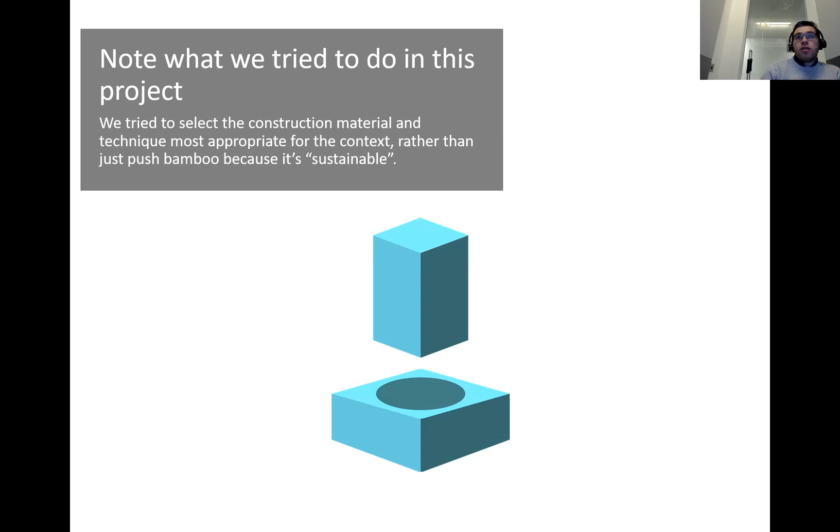Case study 2: we're now in India, in the Himalayas, developing a seismically resilient school residence building. We're in Ladakh, in a highly seismic part of India. We're in a high altitude plateau, quite dry. We're at 3,000 meters.

Working closely with the Druk Padma Karpo School and the UK Drukpa Trust, we developed a disaster resilient form of construction for a school residence in a rural area of the Himalayas that is seismically resistant, simple to construct using semi-skilled labor, durable and low maintenance, cost effective, uses local materials, and replicates the existing aesthetic. That was important for this school because it won quite a lot of awards for its aesthetic, so we had other constraints coming in there - culturally acceptable, thermally comfortable, generally appropriate for the community, and of course, as low carbon as possible.

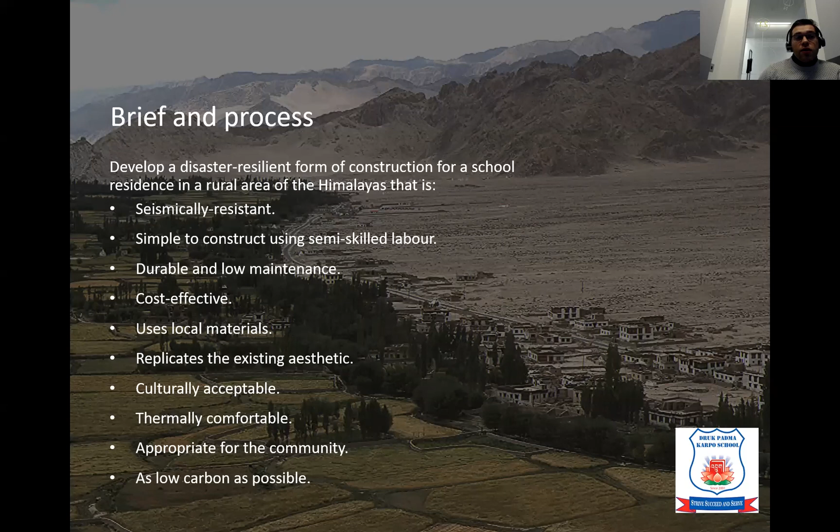We started by reviewing the existing materials in the area - a lot of granite available, there's a lot of mud blocks for construction, timber is also available. We also reviewed the existing construction systems, which historically were just mud brick buildings, and now tend to be reinforced concrete frame with mud brick infill, non-engineered structures, incorporating modern technology with the vernacular.

Unfortunately, the traditional systems, while they're durable, they're not very resilient to earthquakes. This is just an example of some of the failure mechanisms you might see - this didn't occur during an earthquake, you can just see peeling of the stone walls. So these systems can be quite fragile, even if they are durable.

So putting that all together, we developed a reinforced stone masonry design for the school. This we felt was the most appropriate from a resilience point of view and a buildability point of view - it's very hard to go wrong. It's a lot of resilience for a school, which is very important. By using the local granite, we're minimizing the use of high carbon materials. Granite's very low cost there and easy to get to, and we're not taking it from a source that's damaging anything.

We are using a bit of concrete, cement and steel, but we've tried to minimize that as much as possible. We've ended up with something that's fully code compliant, very resilient, easy to build, and relatively low cost - not a very high cost, a reasonable cost.

For the thermal characteristics, we've incorporated elements such as Trombe walls. This is where we've got a mud brick wall which absorbs the sun during the day and radiates heat into the buildings at night. This is able to warm the buildings significantly even with very cold temperatures outside, because these buildings typically are unheated. There's a non-structural risk here in terms of falling hazard from a seismic point of view, so we've restrained those mud bricks with a timber frame.

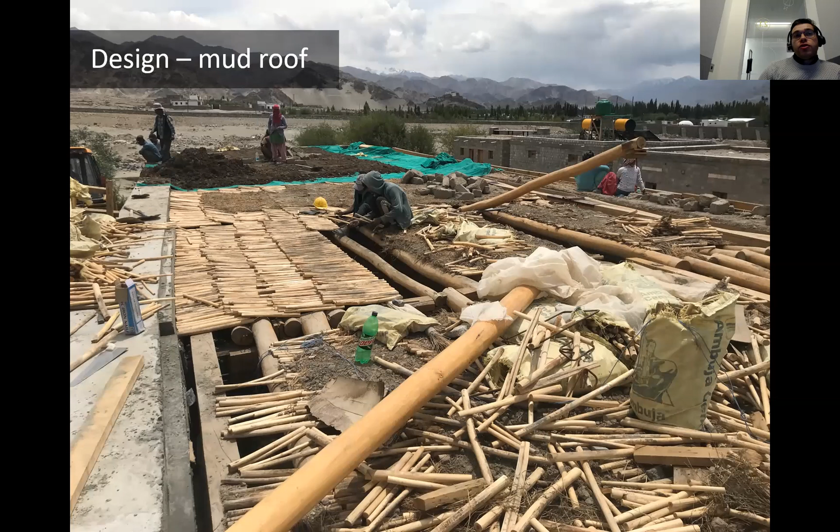For the roof, we explored different roof options. In the end we chose to take the vernacular, which is a mud roof sitting on willow and poplars, and we adopted that but made it safer and made the whole system code compliant. We adopted this in the end because it was actually quite appropriate overall - it's low carbon, easy to maintain for the community there, and they know how to maintain the system. It doesn't rain very heavily there, so it works quite well from that point of view.

It provides the durability requirements. We've engineered the system - we've got a concrete ring beam and concrete beams, so from a seismic point of view we are code compliant and we're happy with its behavior. We've also incorporated green mesh in the background, which prevents any mud falling through in terms of a falling hazard.

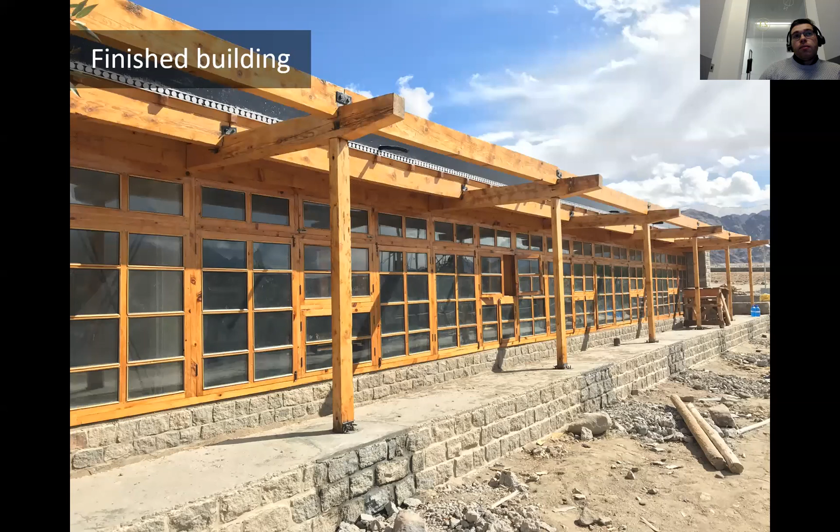And that's the finished building with a timber frame, reinforced masonry walls, and a mud roof. This is also an opportunity to improve health and safety on site, so we've tried to maximize the PPE that we've given to the local workers as well.

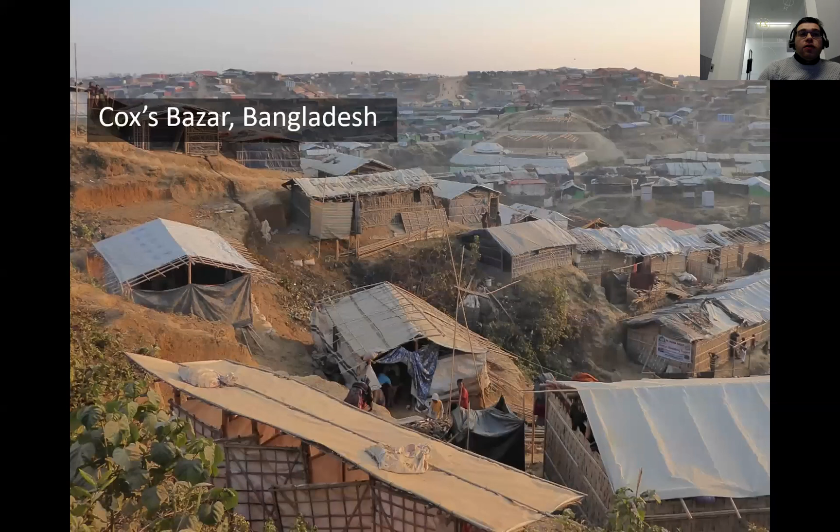Case study 3, now in Bangladesh: improving the durability and resilience to wind of shelters in the Rohingya refugee camps. These communities are extremely vulnerable to winds, so working closely with CRS, IOM, and Save the Children, we tried to maximize the durability and resilience of the emergency bamboo shelters within those limited constraints - we wanted to achieve the greatest wind resistance we could, and greater durability as well, despite very limited funds and materials.

We're in an emergency context, so we can't achieve code. It's got to be simple to construct using semi-skilled labor, and it must not have a permanent feel, which is a political constraint.

We started off working closely with our partners, providing on-site training on how to maximize the resilience of the shelters, using simple techniques such as rope bracing and roped connections. We provide additional training courses and formal guidance for the wider sector to try and support them and share that knowledge.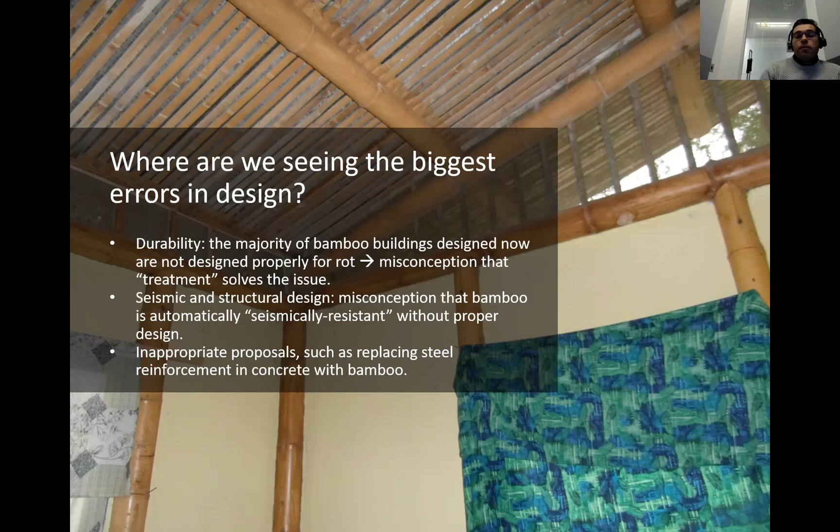So working closely with INBAR, the International Network of Bamboo and Rattan, and the INBAR Bamboo Construction Task Force, which involves specialists on bamboo from across the world, we developed an update to 22156, published in 2021, which is a bit of a game changer in terms of bamboo.

It contains derivation of design values, structural design of beams, columns, and joints, grading, and for the first time, detailed guidance on durability, also guidance on how to make bamboo shear walls similar to the ones we showed you in El Salvador. Other countries are now looking to incorporate elements of this code. To try and share this knowledge, we're also working with the Institution of Structural Engineers to publish a bilingual guide covering this in more detail, providing a platform for engineers around the world to build with bamboo appropriately and safely in various countries.

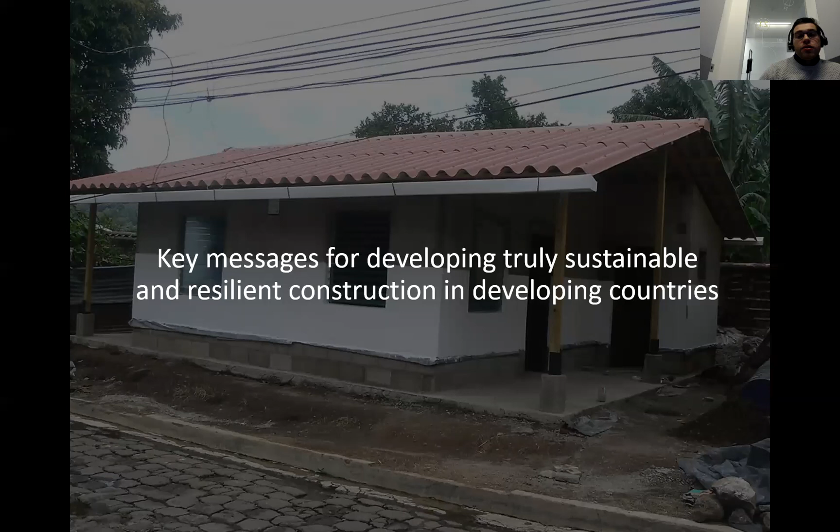I'm going to finish with key messages for developing truly sustainable and resilient construction in developing countries. First, use teams with wide-ranging skill sets. From our experience, the best projects combine multidisciplinary engineers, structural, geotechnical, seismic, mechanical, fire, electrical, public health, with architects and sociologists who understand and respect each other's views. In the projects I mentioned, we used so many specialists from different fields to input, and that was really valuable.

Use community knowledge. Communities have a significant amount of relevant experience. Just make sure it's interpreted correctly and we're not taking something from one context and misinterpreting it.

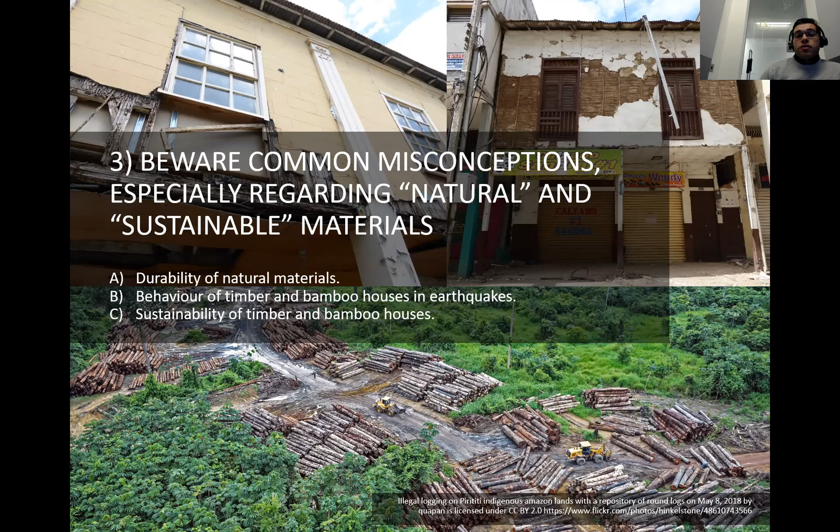Beware common misconceptions in the field, especially regarding natural and sustainable materials. We see this especially regarding durability, also behavior of timber and bamboo houses in earthquakes, and sustainability of those systems.

Avoid bringing in alien materials and technologies. We shouldn't view the developing world as a place for us to experiment with architecture and engineering. We should be pushing boundaries and doing a lot more research in that field, but we should only implement designs that are going to be used by communities that actually satisfy all those criteria. Those contexts are not where we can experiment.

We shouldn't force the use of natural materials such as timber, soil, and bamboo where they're not appropriate or won't be accepted. We should encourage their use, and sometimes we can change people's perceptions, but we shouldn't force something where it's not appropriate.

Code compliance with a 50-year design life is achievable with all materials through proper design. Just because we're using soil or bamboo doesn't mean we can't achieve 50 years. We can. It's normally less expensive and more sustainable when considering whole life costs, and it results in more resilient communities to have something that's resilient from the beginning and lasts at least 50 years.

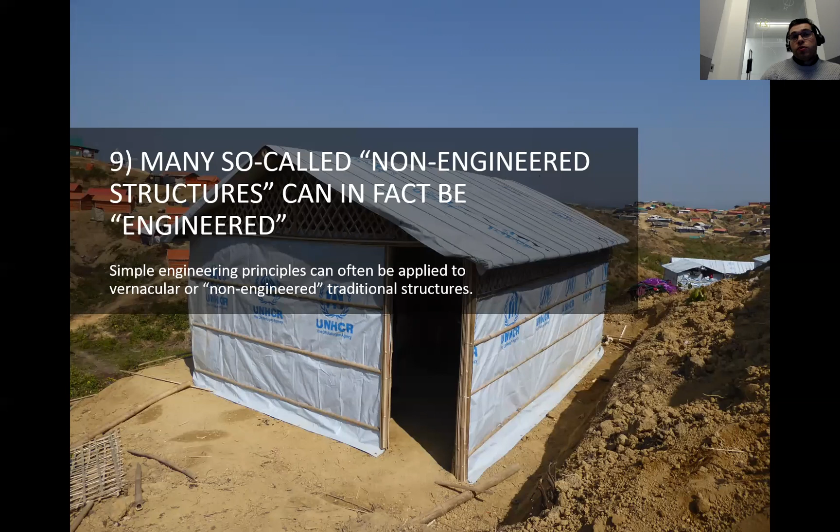Finally, there is no one-size-fits-all construction solution worldwide. Context always drives the solution. In one community, a bamboo house may be more appropriate. In another, a masonry house may be more appropriate holistically. And unfortunately, budget does also drive this.

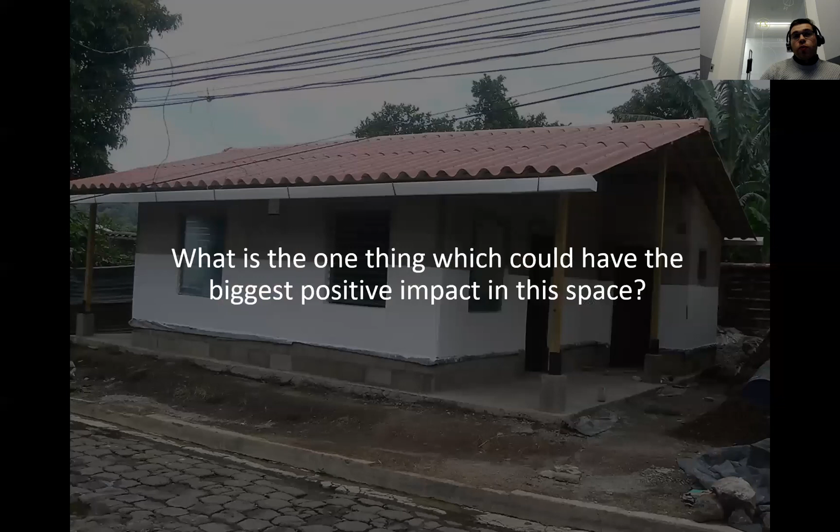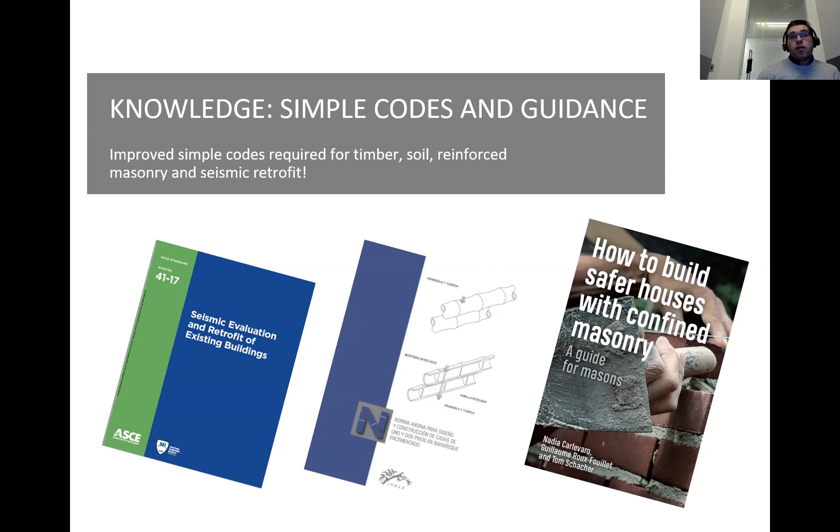Just to finish off, what's the one thing which could have the biggest positive impact in this space? In my opinion, it's knowledge: simple codes and guidance. We need more simple, improved codes for timber, soil, reinforced masonry, and seismic retrofit. ASCE 41 is an excellent seismic retrofit code, but it's very challenging to use. If there was a simpler version that could be used by local and international engineers in these contexts, that would be very beneficial. Also, we need more codes for timber, soil, and bamboo.

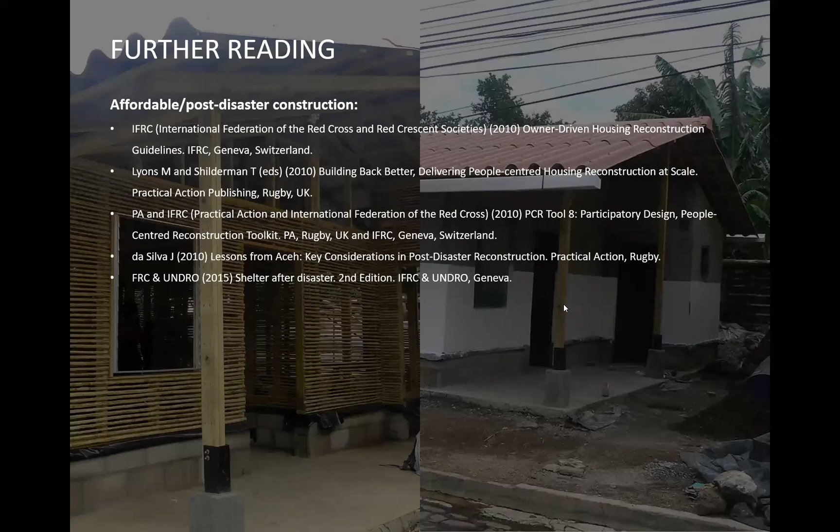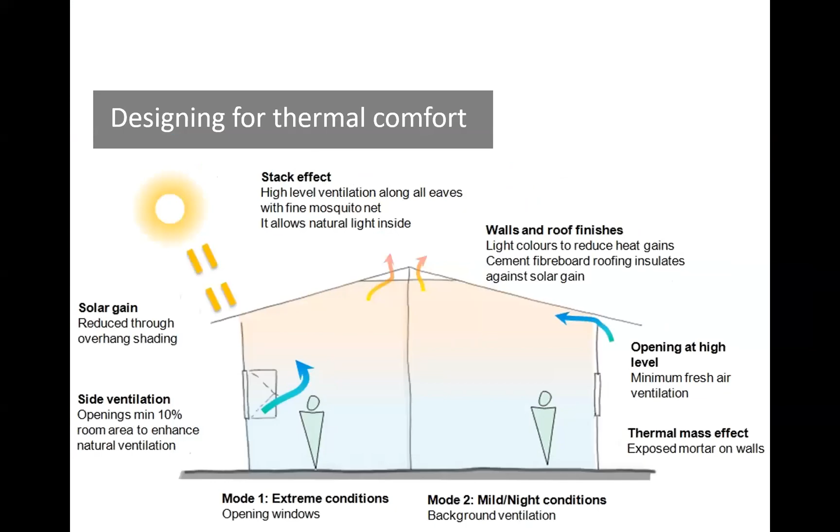My observation is that people were constructing houses traditionally, historically, since a long time, and they were affording those houses. For example, there are 2-3 storied masonry houses with some timber elements in most of the hilly regions in Nepal. So what if we applied some seismic enhancement elements to those houses, rather than giving them different modern options like foreign materials and so on? If we had consulted properly with the communities about improving their existing construction technology, that would have been more sustainable, more affordable, and socially and culturally blended to their lifestyles in the remote areas. So how do you see this? If you want to comment on my view, please.

I think although we were not successful in such holistic resilience in Nepal, we could learn lessons from this and then apply them to similar contexts in other countries, or even in future earthquakes in Nepal.

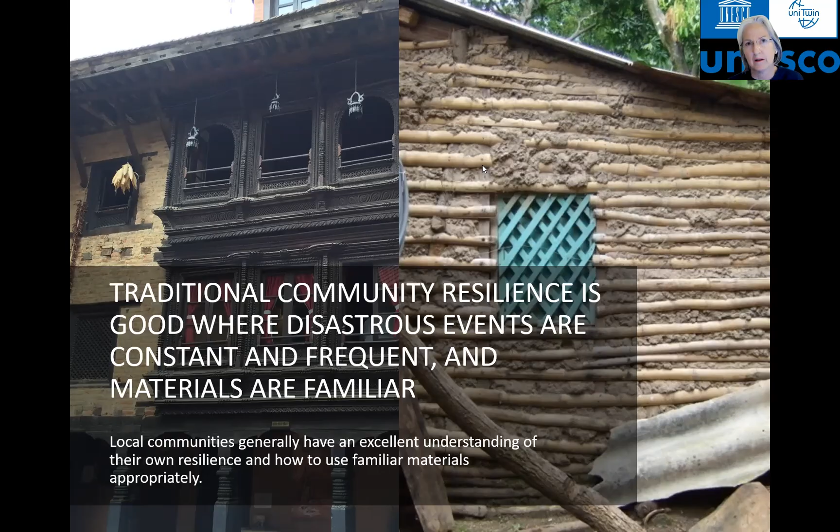The one last question I wanted to ask you is about bamboo structures, because in my travels in Peru, I've noted, especially in the south of Lima, in the more dry, arid part of the country, they do build a lot of brickwork or blockwork walls, which are then topped by floor structures made with half bamboo filled in with poor concrete, basically, and virtually no reinforcement. This is a very common practice in many urban areas, as well as rural areas, less so. They are clearly a sort of transitional form from a more traditional to a more modern typology, but they are certainly a typology that is quite spread.

You were mentioning earlier that some of the work and tests you have done show that bamboo and concrete are not a good mix. So I would like to hear more about that.

So I can't quite picture the system you're talking about. Is it where you have bamboo or timber bracing and masonry infill? Basically, the bamboo is used as formwork for the concrete slab, but the slabs are usually quite thin. You will have half bamboo sitting one next to the other, and then concrete poured on top of them. This is the slab construction technique. It's somehow connected to the wall structure, but the wall structure is not necessarily made of bamboo. It's made of blockwork or brickwork.